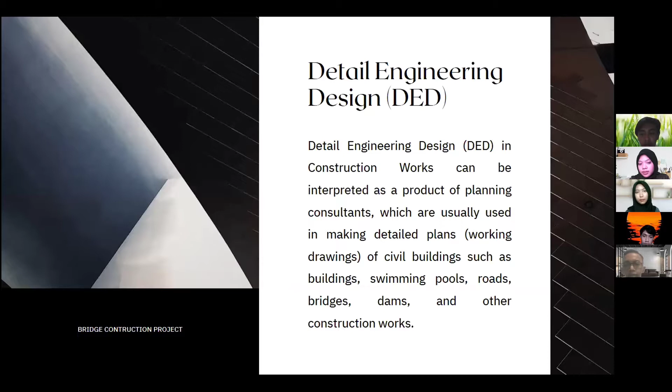Let me turn to the Detail Engineering Design for the bridge construction project. Today I will share the details of my bridge construction.

Technically, the length of this bridge is 1,140 meters, which is divided into three parts: the north side is 520 meters long, the south side is 320 meters long, and the main bridge is 300 meters long.

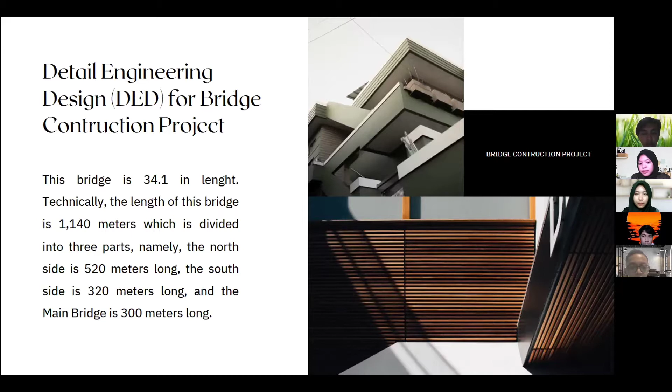The main bridge is a special type of bridge with a cable-stayed system. Cable-stayed bridges are a category of suspended structure. A cable-stayed bridge is similar to a suspension bridge in that it has towers and a deck supported by cables. However, its diagonal cables transfer the vertical load from the deck directly to the tower.

Thus, the main deck of a cable-stayed bridge works like a continuous beam on cable supports, more flexible than a base support, with additional compression force throughout the deck. A cable-stayed bridge is also a pressurized system.

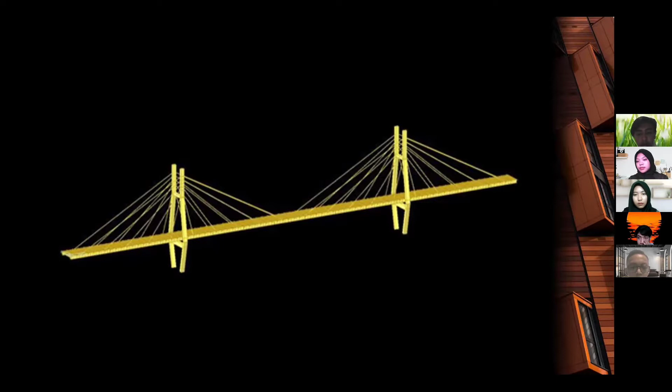The cable-stay tension counterbalances a significant part of the vertical load on the mid-span. With a distance of 150 meters between pylons, the main elements of a cable-stay bridge are the tower or pylon, the deck, the cable stays, and the anchorage and foundation. Tower and pylon are interchangeable terms; later, slender towers are often called pylons.

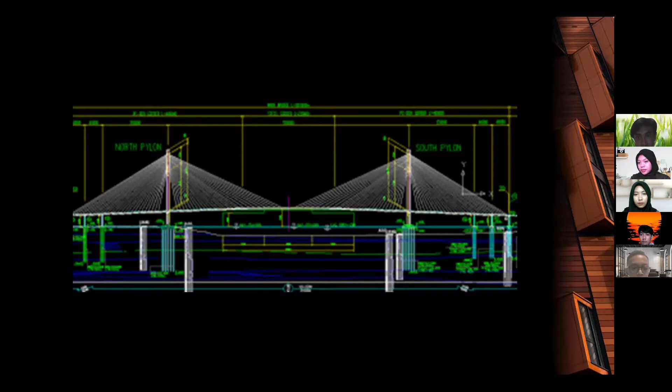The construction of the bridge requires concrete with a base quality of approximately K-350 concrete. That's what I have to say about the detailed engineering design for the bridge construction project. In conclusion, the detailed engineering design in the construction work can be interpreted as a product of the planning consultant.

This bridge is 34.1 in length. Technically, the length of the bridge is 1,140 meters, which is divided into three parts: the north side is 520 meters long, the south side is 320 meters long, and the main bridge is 300 meters long.

And this main bridge is a special type of bridge with a cable-stayed system.

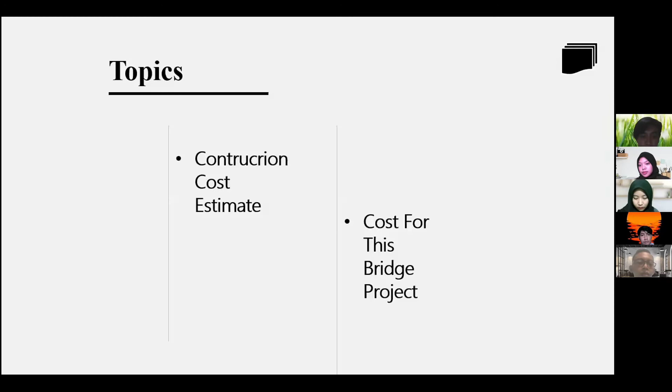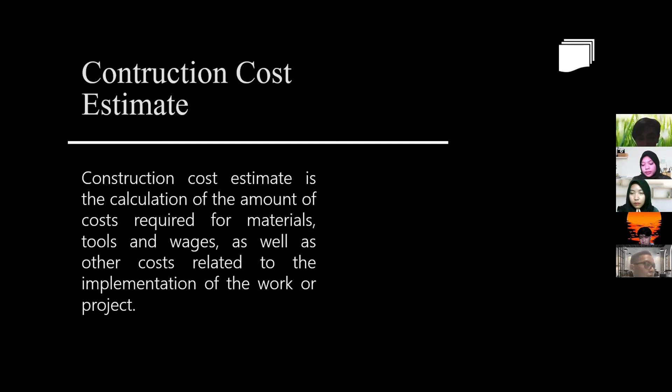I will explain what a construction cost estimate is. A construction cost estimate is the calculation of the amount of cost required for material, tools, and wages, as well as other costs related to the implementation of the work or project, based on the raw materials needed to build this bridge, such as concrete, steel, sand, river stone, cement, kerosene, and concrete wire, and so on. The construction material industry consists of a wide range of companies involved in the mining, quarrying, and processing of raw materials used for both heavy and building construction. Well, that's what a construction cost estimate is.

Now I will move on to the cost for this bridge project. This bridge costs approximately 168 billion rupiah. This fee also includes wages for workers, foremen, and so on. For the wages of our workers, we guarantee that they are in accordance with the standard. We have prepared a bill to pay their salaries. Salary will be given every month for the foreman, driver, operator, mechanic, chief, and handyman.

The salary we offer is 42,000 per day. As for the assistant, we have offered a salary of 3,000 per day, because their task is not too difficult. For the payment of the handymen, we will instruct the head handyman to distribute the salary among the handymen, so that we don't have to bother sharing it ourselves.

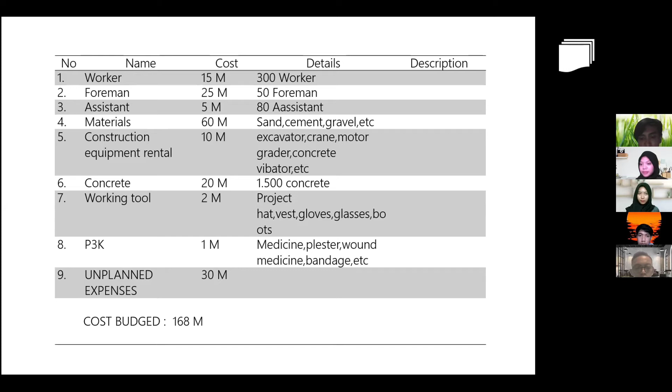Let's sum up. A construction cost estimate is the calculation of the amount of cost required for material, tools, and wages, as well as other costs related to the implementation of the work or project. This bridge costs approximately 168 billion rupiah, and this fee also includes wages for workers, foremen, and so on. Thank you very much for your attention. Are there any questions?

I think there's no question, Mr. Lutfi. Because this is a large project and requires quality raw materials, I would like to cooperate with Badan Perwira's company. After that, we also have to discuss work safety for workers, so that the construction of this bridge runs smoothly and is not hampered.

So we need a variety of safety facilities and equipment for workers. For more details, I leave it to Mrs. Elicia.

Okay, thank you, Ms. Fimelia. Let me explain in more detail about work safety. Our company places great importance on the safety of its workers. Work safety is an effort to ensure the physical and spiritual integrity and perfection of the workforce, in particular, and human in general, as well as the result of work and culture towards a just and proper society.

The work safety facilities that we provide are vests, hard hats, first aid, boots, gloves, and glasses. We also provide a post if something unwanted happens, such as a minor accident at work or a worker suddenly getting sick, so they can be treated immediately, and to make sure everyone's safe on the job site, one of the biggest risks for any construction job site.

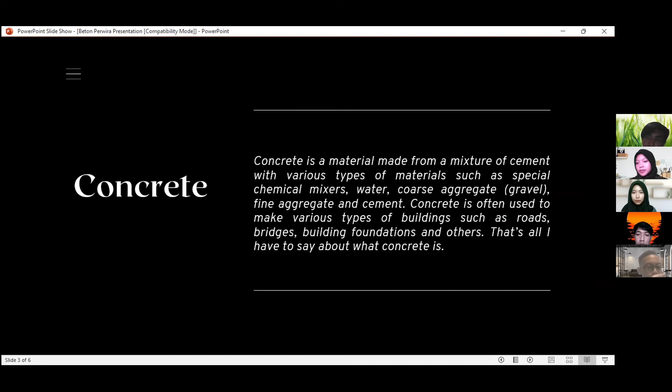Concrete is material made from a mixture of cement with various types of materials such as special chemical mixers, water, coarse aggregate or gravel, fine aggregate, and cement. Concrete is often used to make various types of buildings such as roads, bridges, building foundations, and others. That's all I have to say about what concrete is.

Next, I will mention our concrete product. As we can see, not all concrete companies have high quality concrete. So our company created an innovation of high quality and strong concrete. So I will introduce you to the best concrete for bridge construction.

Our company sells iron concrete with the best quality, given the large amount of concrete needed to build a bridge. We will offer you a very attractive price. Our company sells the concrete for 57,000 rupiah per gram for small quantity purchases. Concrete iron from the Perwira brand is suitable to be applied to various building construction such as toll roads, bridges, public buildings, and other buildings.

Our concrete iron has a tolerance of about 0.2 centimeters. Perwira steel bar is also included in the range of concrete iron that meets SNI standards. We have now looked at our concrete product.

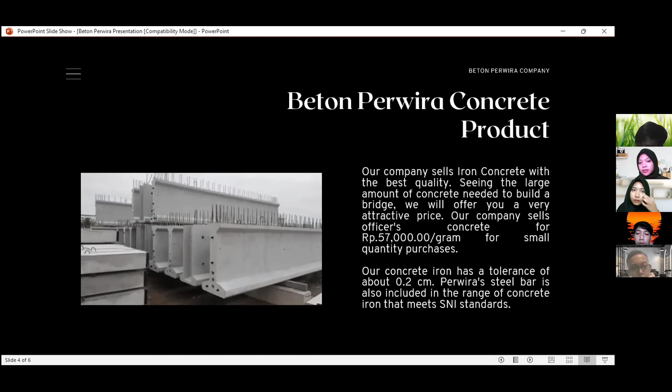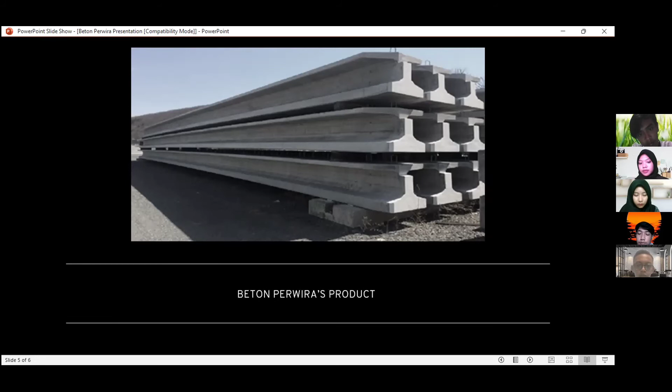In conclusion, concrete is often used to make various types of buildings, such as roads, bridges, building foundations, and others, but not all concrete companies have high quality concrete. So our company sells iron concrete with the best quality for 57,000 rupiah per gram for small quantity purchases. Concrete iron with this brand has a tolerance of about 0.2 centimeters, and Perwira steel bar is also included in the range of concrete iron that meets SNI standards. Thank you so much for your attention. Can I answer any questions?

Oh I see, the amount of concrete I need is very large in my opinion. I can get a lower price than that. What do you think? I think I have given the best price to this company.

But if you agree to work with me, I will give you a down payment of 35% instead of 50%. Do you agree with the offer I give? Okay, I agree. Well, thank you for explaining your products very well and in detail. I will soon sign a letter for the cooperation of our company.